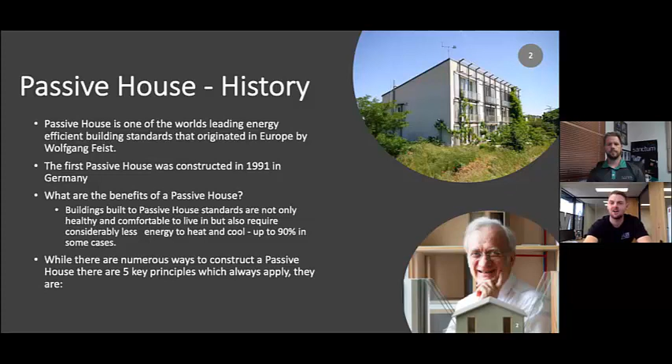So we're going to talk today about the 5 principles of Passive House. Thanks to the Australian Passive House Association, we've captured this image here - it's pretty well known. We've got insulation, passive house windows, ventilation, air tightness, and thermal bridge design. These are all critical aspects of the design and also the build process.

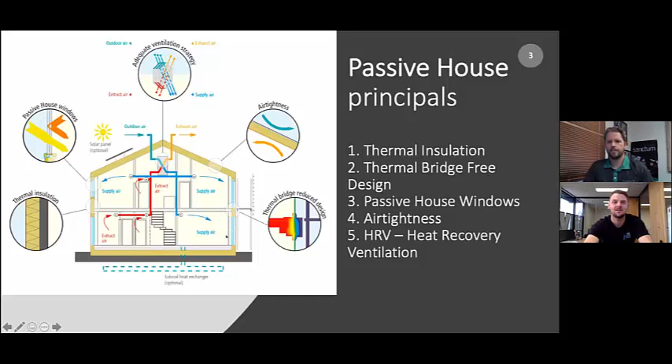So I'll throw it over to Hamish and he'll start with insulation. Thanks, Jesse. G'day everybody, and thanks again for joining us today. It's really great to see so many people wanting to know a little bit more about Passive House. As Jesse said, first up I'm going to talk about thermal insulation.

In a typical passive house build, you would generally see thicker wall build-up. In the model that we're going to show you a little bit later on, we've got a 140 stud, which will allow an R4 insulation batt to go in there. What's really important to note is that the climate data for the area is the real driver for R values. In the passive house project that we've got coming up in Kyneton, it's called up for R6 on the underslab, R8 in the walls, and R10 in the roof.

Whereas our passive house in Viewbank is R2 under slab, R4 in the walls, and R7 in the roof. Kyneton's obviously a colder climate, so there's a greater need for higher insulation, just because there's temperature differentials between inside and outside, or greater swings in temperature differentials.

One of the most important things to consider with insulation in a passive house is that it needs to be continuous. Proper planning is really crucial. You need to insulate the external corners and the wall junctions before your external wrap goes on. If you don't do these things, you can create a thermal bridge, which is something that Jesse will talk about next.

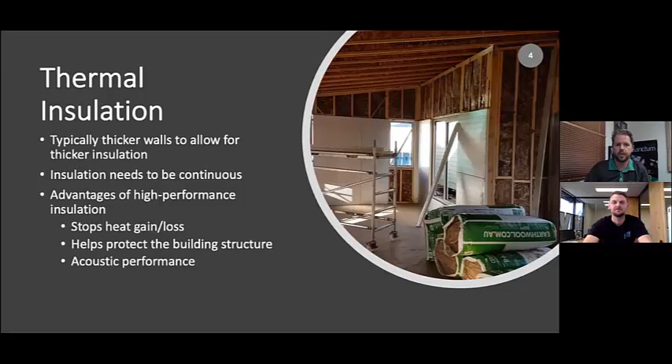Some of the advantages of a high-performing bulk insulation: it stops heat gain in summer and heat loss in winter, which helps control the internal environment. It helps protect the structure by eliminating cold spots, which can lead to moisture buildup and mould. And as a byproduct of a thicker wall and thicker insulation, you have better acoustic performance.

Just going to talk now a little bit about a couple of types of insulation. Fiberglass or wool, which is your bulk insulation. EPS, which is expanded polystyrene - this is something that we typically use in a SIP panel. SIP construction is something that we really like at Sanctum Homes. It won't degrade, it's reasonably impervious to moisture, and it can also be used as an external cladding, where you can just put a render finish on it.

The next point is XPS, extruded polystyrene. It's a thinner board and it gets higher R values. This is something that we would typically use underneath a slab. It has a high compressive strength, and it can usually be installed under internal and edge beams while still maintaining the required bearing capacity, so it allows us to have that continuous insulation the whole way around the house. Again, it's reasonably impervious to moisture.

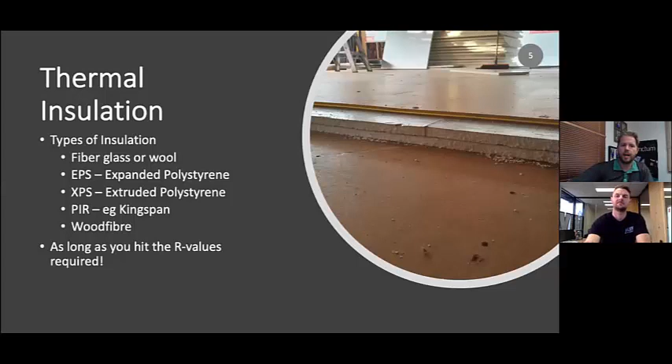Another product is a PIR board, for example Kingspan. If you look at the picture on the slide, Jesse's used that in between some layers of yellow tongue. It's a rigid board, high compressive strength, closed cell, so it's impervious to moisture. And it's also airtight, so it can also help with our airtightness barrier, which is something we'll talk about later on. It's just really important that we are hitting our R values when we're constructing a passive house.

It's really, really important that we check over all the insulation before we cover it up, either with our external wrap or our internal linings.

Don't stuff insulation into a cavity. Fibre and wool products can slump, creating cold spots.

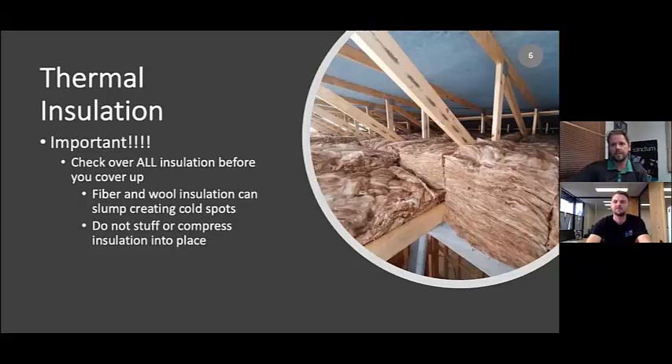As mentioned previously, make sure that you insulate all your wall junctions and external corners prior to your external wrap going on. We actually keep all our XPS and EPS offcuts, and we'll use these in junctions, cracks and nooks and crannies, then just put low expansion foam around them to eliminate any air leakages.

Over to you, Jess. That's it, is it? That's it. Over to you.

Yep, all right mate. Well, I drew the short straw out of this and got thermal bridge. I know it's not the most exciting element or principle out of the 5, but I think it's a very important one, and one that you have to pay a lot of attention to detail, not only in the design process but also out in construction.

So as Hamish just pointed out, it's very important to have continuous insulation, and that will help, if not eliminate, a thermal bridge. Not only does it have to be continuous, it has to be sufficient as well. So it's something you definitely don't want to slip up on.

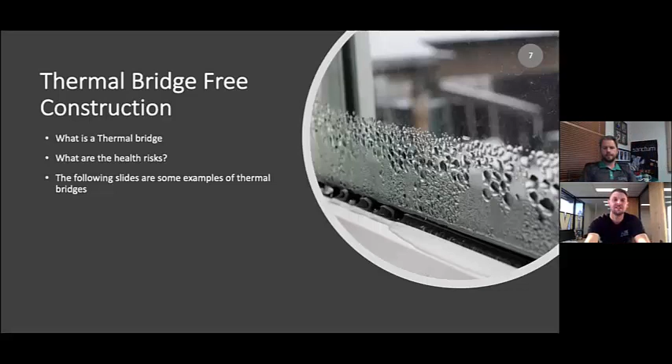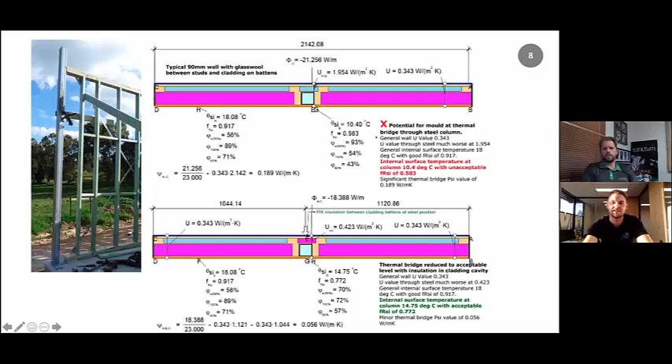So we're above the 13 degree dew point inside now, so you're not going to get the condensation.

We didn't want to have a continuous insulation under our internal floors when we were building the frame. So we spoke to the designer, came up with a solution for what we wanted to do: build the internal walls down onto the chipboard, and come up with a solution to minimise the thermal bridge.

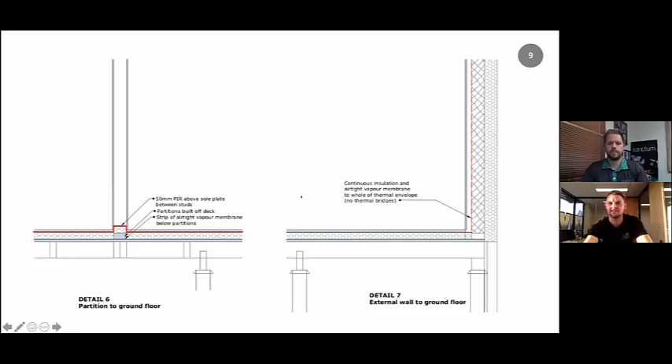Fill up around the window with expansion foam. Make sure you tape externally as you would tape internally for air tightness. What that does is get rid of the external air from the pocket. The expansion foam doesn't have much of an R value, it's more just getting rid of that air.

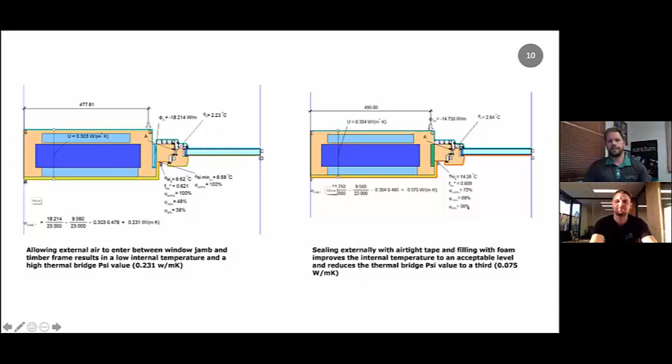Over to you, Hamish. Thanks, Jess.

Next I'll be talking about high performance passive house windows. Some of the key features of passive house windows and doors are that the windows themselves, or the frames themselves, are thermally broken, or they're made of a non-conductive material like UPVC.

So what this means is there's no thermal bridging. We're probably repeating ourselves a little bit, but it's a point we want to drive home: an aluminium frame that's not thermally broken can result in heat and gain loss, which causes condensation, like one of the previous slides. So it's really important that the windows are either a non-conductive material or thermally broken.

They also want to be airtight, so that's one of the other pillars of passive house. A typical airtight window might be a tilt and turn or a lift and slide. And they're usually double or triple glazed, and depending on the climate, they might have a low E film or other high performance glass.

As Jesse was just pointing out before, the installation of passive house windows is really crucial to the success of a passive house project. Not only must the window and door be airtight, but the frame in which it's installed also needs to be airtight.

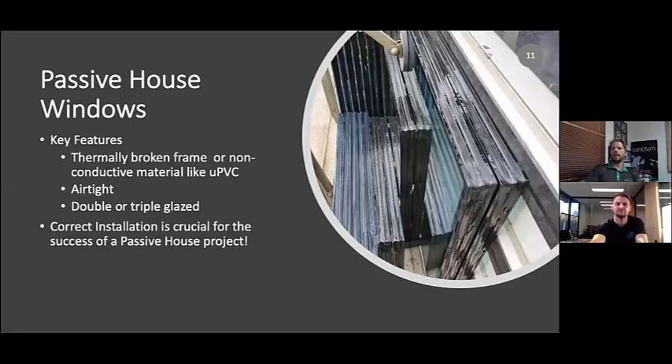So we'll do this internally and externally, as Jesse said before. I might just talk about some of the practical ways in which we do that, and we'll also demonstrate this in a video.

We would typically tape a strip of Intello internal wrap to the window prior to installation, and then we'll tape that strip back to the frame. As I said, we'll demonstrate this in a video a little bit later on.

We'll also tape the window externally to the wall membrane, and we'll also use low expansion foam, as Jesse said, between the window frame and the timber frame, and this helps with heat loss gain and also air leakages as well. We're not actually relying on that for a high R value, but it's better than having just air rolling around in that space.

What is a U value? Now, it actually took me a long time to get my head around a U value.

A U value is quite important when selecting passive house windows, so we want to go for the lowest U value possible. A U value is the measure of the flow of heat through an insulating or building material, whether that's the glass or the frame of the window.

And we'll usually talk about that as its installed value. So rather than just talk about the glass or the frame, we want to know what the total U value of that window unit is, installed. And again, we want that to be as low as possible.

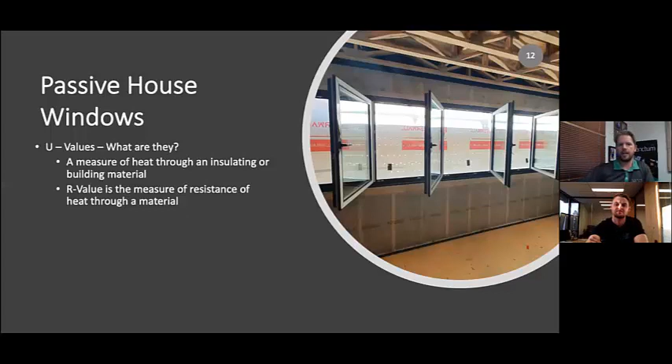Or am I on airtightness? Oh no, that's me. Yeah mate. Yep.

As we talked about before with the windows, they want to be airtight. So not only do windows need to be airtight, but the building needs to be airtight. We're looking at, in a certified passive house, 0.6 air changes per hour at 50 pascals of pressure.

According to the CSIRO, a typical Australian home built to current minimum standards could see up to 15 air changes per hour. Just for the record, that information is old, so if that is incorrect, I apologise. But in older homes, you can actually see a higher air exchange per hour.

Our air changes per hour is measured using a blower door test, done by a third party. It's done at lockup before plaster, but after services have been run, and then also on completion. The reason we do it after the services have been run is because there might be some penetrations through the internal air barrier, which you can see in the picture there, the Intello. We'll also show a video later about how we install that.

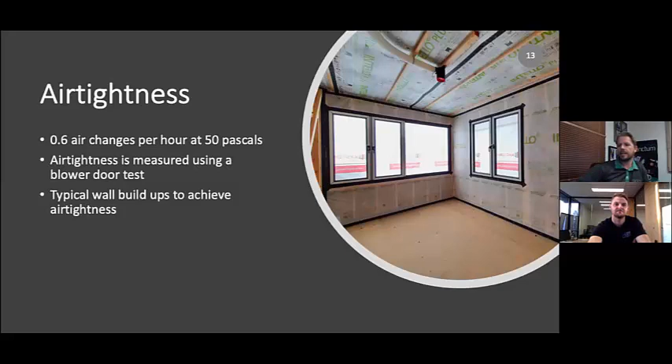Next slide. So, typical wall build-ups to achieve airtightness. We're generally relying on our internal air barrier as our primary air barrier, but we do try and manage airflow, or the tightness of a building, externally as well.

In a practical sense, we do this using a high quality external weather resistant permeable barrier like Pro Clima Extasana. This is like wrapping the building in a Gore-Tex jacket. It protects the building from moisture, so it doesn't allow moisture to get in, but allows moisture to move out of the building. The building doesn't sweat, so it doesn't have an opportunity to build up moisture within the wall cavity, which could lead to degradation of the frame, but also mould, so an unhealthy building.

So it's our first barrier of air movement. It stops the movement of air through the insulation. This is really important as it allows the insulation within the wall to perform as it's designed.

We'll tape all our joins, our pipe and cable penetrations, and we'll also tape in our windows and external doors. Internally, we'll use a barrier like Pro Clima Intello. Just for the record, I'm not sponsored by Pro Clima, it just happens to make some really great products.

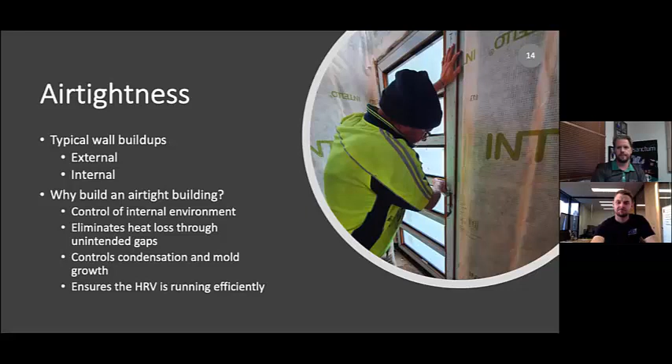Thanks Hamish. Alrighty, so the heat recovery ventilation system, or mechanical ventilation heat recovery system, is commonly what they're known as. These two items are very similar, actually pretty much the same thing apart from an extra word thrown in there. Then there's another one, the ERV, energy recovery ventilation. This unit is slightly different, it actually transfers moisture as well as heat. Typically you're not going to see one of these units down here in Melbourne, they're going to be much further north, up Queensland I'd say, where the humidity is quite high.

In the passive house world, you always hear that the HRV is the heart of the house. It's pretty true, I guess. It circulates filtered fresh air throughout the house, which is essential, as Hamish was saying, with having an airtight barrier.

There are two types of HRVs: a centralised unit, which is the unit in the picture here, and a decentralised unit. The centralised one you'd have inside the building, and it ventilates the full house. A decentralised one is something you'd install in an external wall, and that just ventilates a single room.

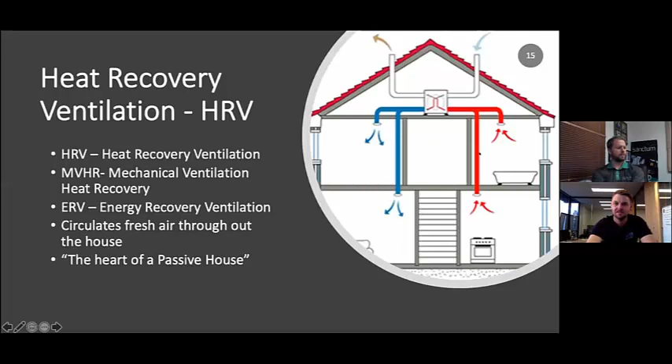So we've got a few slides here. We'd like to explain a bit more about these units and how they're installed. Let's talk about this first unit here.

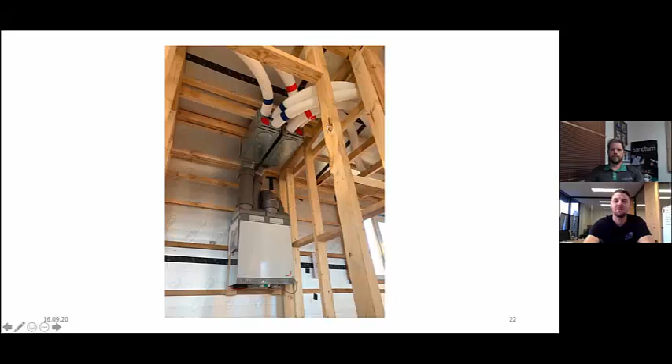This is the smallest centralised unit you can get. We installed this one in 2019 for Premier Homes. We've got a display home we partnered with, and we've actually left this utility room unplastered, which is great for when people are walking through - you can see the guts of how it all works. Also with the ducting, we took it on a first in, best dressed basis, so we got these pipes in before the plumbers and electricians got their stuff in. I think it's much easier for those guys to do their wires and pipes around our bigger pipes.

Next unit is a centralised unit as well, but this is a much bigger unit, designed for say a 4-bedroom home. The two boxes on the top right hand side here are attenuators - these are actually silencers, and it's very important that these are installed. They aren't mandatory, but we make sure we put them on all our jobs, because the last thing you want is a noisy system. These actually work really well. This unit itself is very efficient - it can recover up to 90% of the energy taken from the building.

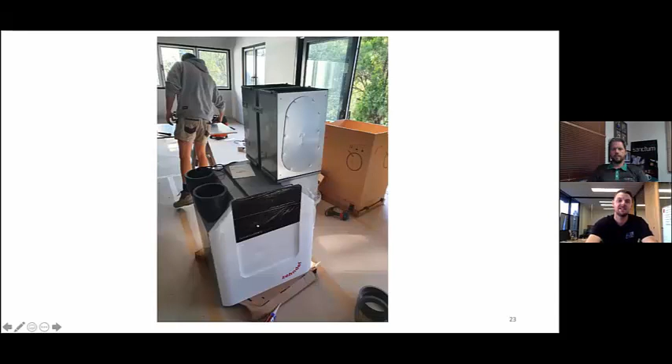Generally in a passive house building, heat is generated from body heat, cooking, and lights. That heat is enough for the HRV to pick up and then filter through the rest of the house, like I explained before.

Alright, this is probably our latest project, where we created a 150mm service cavity space for the ceiling. It worked out pretty well. We ran the ducting in first, like I mentioned before, so easy. Then our plasterer came in and installed his suspended ceiling. It worked out perfectly with the 90mm ducting fitting in between the 35mm batten and the furring channel, and also plenty of room for the electrician to put his downlights in too. So it was just a nice, easy solution there.

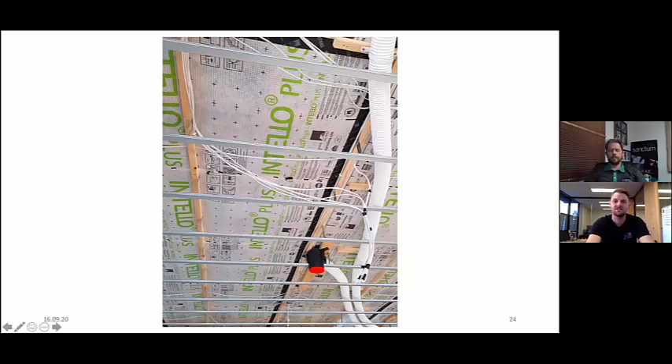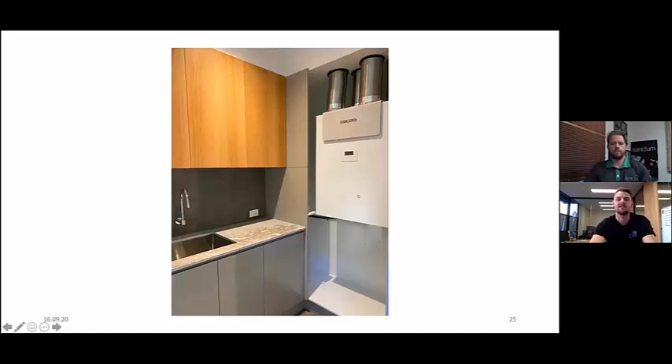Our final image is from a completed house of ours. We had the unit tucked away in a laundry cupboard - a pretty neat solution. Another benefit of having it in the laundry is you're close to a sink, so you can connect the condensate drain into the waste pipe here. So it's just another thing to note - if you are going to put one in its own utility room, I'd suggest you remember to put in a waste pipe penetration at the time.

There's a few other things worth mentioning about HRV installation. If you're going to install an HRV in a passive house, it's pretty essential to get the unit inside the thermal envelope. Two reasons: if you run your ducting outside the thermal envelope, it has to be heavily insulated so you don't lose conditioned air temperature inside those pipes. Also, you'd be penetrating the airtight membrane, creating potential for leaks. So always try to keep it inside the thermal envelope.

They also come with bypass modes, which you'll generally use at night time. If you've had a few warm days and the house is slightly overheated, at night when it's cooler outside you flick the unit to bypass mode. Instead of exchanging air inside the unit, it brings fresh air straight from the outside, filtered straight into your house, enabling it to cool down.

It also comes with boost switches as well. Actually, going back to bypass mode - like Hamish said, you've got the Passive House windows, which are a beautiful product. Don't forget, they're always operable, so if you need some night ventilation, open up your windows and get some cross ventilation. It's going to be the best method for night cooling.

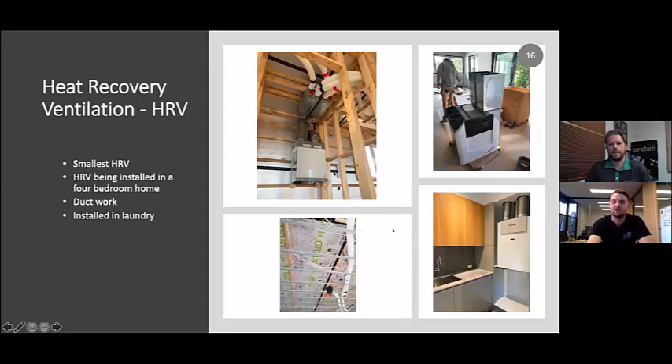Okay, so we just briefly wanted to touch on comfort. Typically a passive house's optimal indoor air temperature will range from about 20 to 25 degrees all year round - that's what we're aiming for.

We always get the question: does a passive house not need a heater or air conditioner, doesn't it need heating and cooling at all? Well, that's a pretty hard question to answer because everybody's different. Generally a passive house can overheat up to 10% of the year - the PHPP calculations do allow for it to overheat. So there might be a heat wave in summer where the house gets over 25 degrees for a few days in a row. It depends on the person - if they can handle 26, 27 degrees for a couple of days, that'll be fine, but some people absolutely cannot.

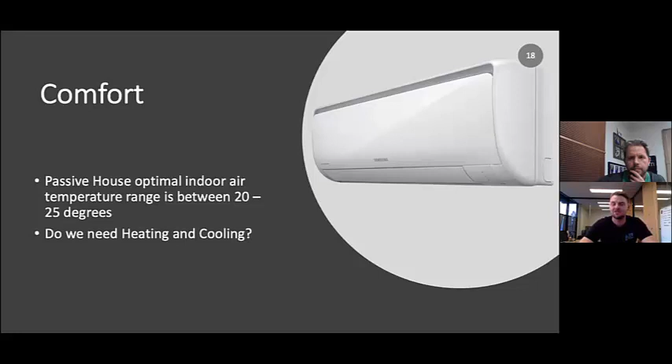So we always recommend putting an air conditioning unit, a split system, in our houses regardless, because at the time of construction, when you've got taping and membranes and all that happening, you can install the unit properly. Whereas if you try to retrofit one later, you're going to have difficulty with that. So the answer depends on the individual, but I would put one in myself.

Just to touch base on certification as well - some people ask, is certification required? Well, I guess that depends on the individual, the build, the design, and the budget. The way I see it, you've got a third party overseeing the job, and there's not too much extra to it since you're going to take these steps to reach these goals anyway - things like blower door tests you have to achieve, commissioning from the HRV, and you have to provide a construction report to the certifier from our construction manager. I think it's totally up to the individual, and it's not something I preach - it's definitely something that's up to the person.

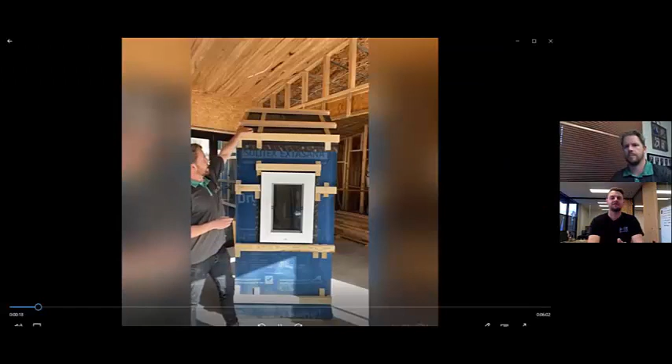And once you can have our Intello pro clima wrapping, that then flows into our Solitex Extasana here, and that's all taped through. We wrap the whole building with this product. The other thing you notice is we have offset battens on the roof and walls, which allows any moisture that gets into the wall and roof assembly to drip down, get into the wall cavity, and get out the bottom. Typically this will be ventilated, so it'll have airflow through it, keeping this wall assembly nice and dry throughout the life of the building.

The other thing you can see here is our UPVC window, which Ryan's taped up to the membrane, so this is a complete watertight unit as is. We could have the frame up, wrap our buildings in external wall membrane, and we're basically watertight and ready to go - so we can have guys working inside and outside.

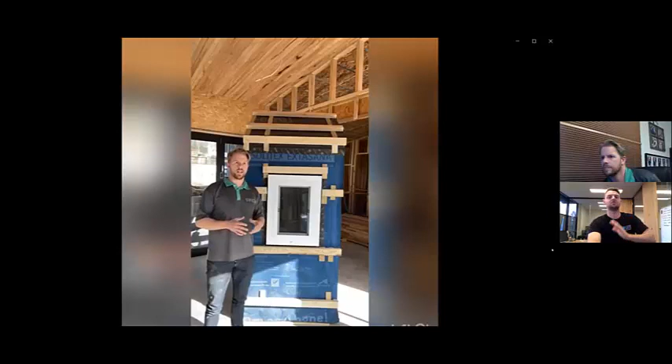One of the other things I'll talk about here is that this is not considered our airtight barrier when we're talking about airtightness in Passive House. It all does work together, and this is essentially airtight as it is, but its function is to allow the insulation within the wall cavity to work how it's meant to.

Think about going outside and putting a jumper on in winter. You'll remain warm for a little bit, but if it starts to rain, that jumper is going to get wet and won't provide any warmth. What we're doing here is essentially putting a Gore-Tex jacket over the top of that jumper. So the wrap is going on top of the insulation, and that Gore-Tex jacket allows the insulation to perform how it's meant to.

This does stop airflow from going through the insulation, so it allows the insulation to trap the warm air inside. Inside this wall assembly here, we've got 140 mm studs, so we've got an R4 insulation back within the stud. And we know that by wrapping our buildings with this membrane, those R4s are working.

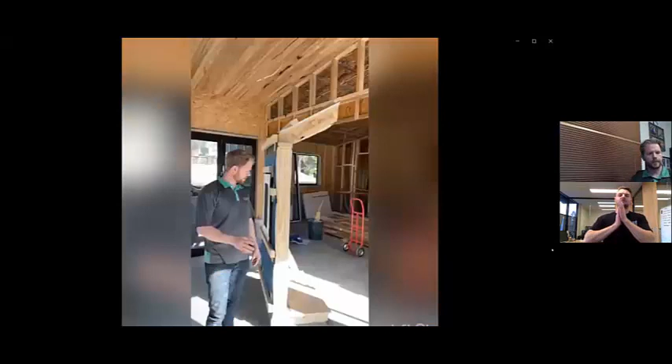What I want to show you now is essentially a cross-section of the roof, the wall, and the floor, just to demonstrate that we require in Passive House to have continuous insulation. You can see that we've got continuous insulation here, down the wall, and along the floor with no thermal break. Aside from our timber structures here, we have continuous insulation the whole way around. This is a really crucial element in Passive House.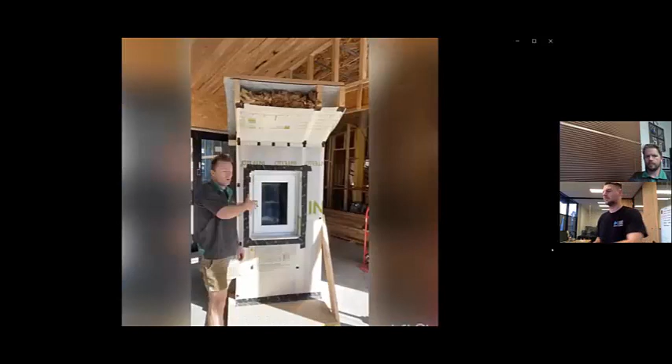And a really crucial element to get right. But myself, just to talk more about the internal side of the Passive House layering and this Intello wrap, its primary factor is to really create an airtight barrier, because with all passive houses we've got to get down to a 0.6 air exchange per hour, which is measured using a blower door test, which I'm sure the guys will speak to you a little bit more about, and how we get there and what the effects on a passive house will be.

So from this Intello, as you can see, we're still using the tapings to make all the connections and make that airtight. One thing you'll see on the internal side that you would have seen on the outside is these smaller pieces cut up. That's actually covering up our staples that are the initial hold for the Intello onto the frame.

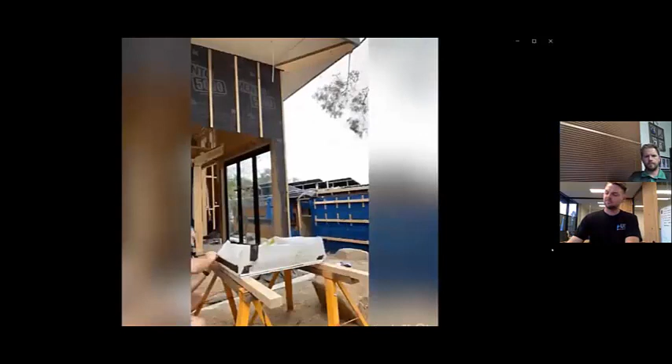As well as on the internal side, there's this wrap for the window to connect to the inside of the Intello. So as you'll see in a quick time lapse here, this shows how we actually fix that Intello to the window and then onto the Intello on the internal side.

Finally, you'll probably see on the floor down here, we've just got a chipboard floor, which is obviously a pretty common material in the building industry, but that's actually also considered an airtight layer, as it's connected with the tape to the Intello on the internal side.

So I touched upon the window, but the actual performance of the window is probably just as critical as all the taping and all the paper that goes into it. So this we've got here is a triple glazed high performance UPVC window.

UPVC is a material that's a very low conductor of thermal energy. So as opposed to an aluminium window where the heat and cold transfer through really quickly, this will act almost like an insulation on its own.

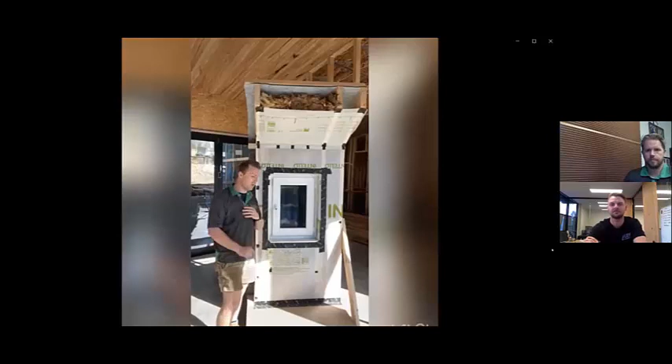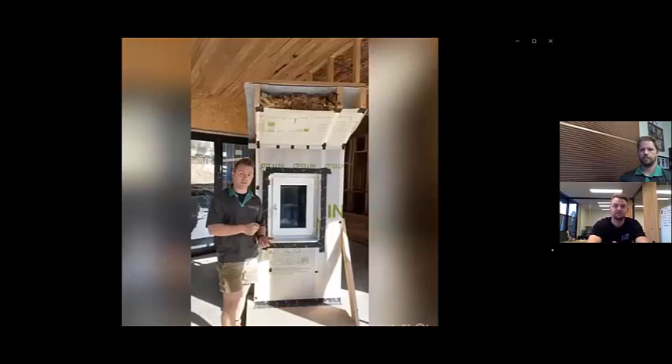It's important to note that it still does act like a window if you wanted a breeze coming through, or overnight just with that security function. So it does have two opening functions, but while in the lock function, it is completely airtight as part of that external layer, because that is the aim of the exercise, getting these windows in and airtight. Doors are similarly right up there with getting that right. So having a product like this that actually helps us get it airtight makes life a lot easier.

Well, I'll chuck back over to you, Jess, sorry everyone about that technical difficulty there. We got there in the end. No worries, mate, good work.

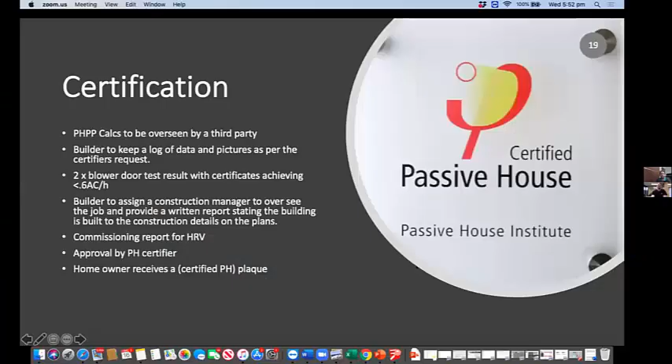I just wanted to also touch on the sustainability credentials of Passive House - it's more about the low energy consumption it uses. It's not so much about the products and the embodied energy in the products.

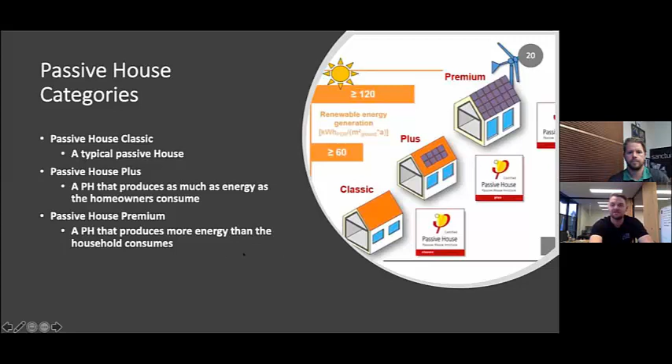So I think it's pretty much time for questions, Haim, if you're ready to roll, mate. Hopefully we can fumble our way through any answers that we don't know. All right, Simon, you guys ready to go? We've got plenty of questions here, as you can imagine. I'll start from the top, so I'll throw this to either of you.

How does a HRV work in a warm season? That's a good question. Yeah, in summer, the HRV, instead of retaining the heat in the heat exchange and putting it back into the building, will put the heat outside and use the cooler air into the building. So you're not actually going to be pumping heat into the house, and obviously the moisture in the air too, it will take care of that. Like I said before, if the humidity is too high, that's when you're going to start to require an ERV, not an HRV.

Another one, Jess, in relation to HRV from Daniel Worm - can anyone install a HRV, or do you need to use a HVAC expert? Yeah, look, I generally say if you're a certified passive house tradesman, no doubt you're capable of doing some duct work. But on our first job, we got a professional contractor in to do the whole unit, and now we get them just to commission it. If someone has never done it before, I wouldn't recommend attempting it themselves.